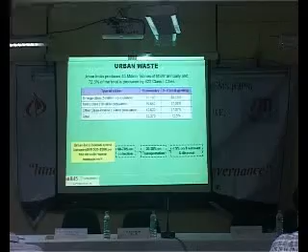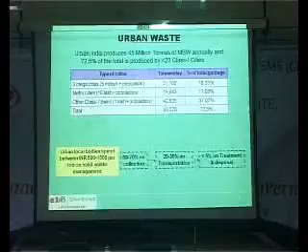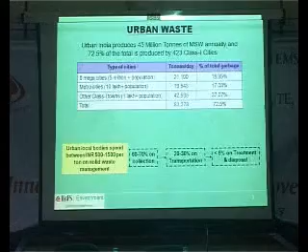Looking at municipal budgetary provisions, almost 500 to 1500 rupees per ton is being spent on various activities in waste management segments—collection, transportation, treatment and disposal. Predominantly across the board, most urban local bodies spend the majority of money on collection and transportation. Unfortunately, only 5% of the budgetary allocation goes into treatment and disposal, which is the major cause for concern.

My presentation is going to focus on that, because we have done a lot of work and developed good practices—in fact, as mentioned this morning, compactors and other measures have been introduced. Garbage is something you can visually see, and there's a problem with the city's urban local body being unable to manage it. But it's not really the fault of the urban local body, because at the end of the day, it is not them who created the garbage—it is people like us, the citizens, who create this waste, which creates a problem like this.

But if you look at it, whether it's Dhapa in Kolkata or Deonar in Mumbai, the physical features of any dumping ground are almost similar. I don't even need to name the place, because the majority of urban local bodies face this kind of problem where open dumping is happening. There is absolutely no scientific management of collection, transportation, treatment or disposal, and majority of these places are in the middle of residential or commercial areas, causing huge issues for people living around them.

It's not only an environmental health issue, it is also a social issue. People who live around that place are socially ostracized, in their family, with their friends and all. There are examples for it, and in my presentation I will briefly talk about that.

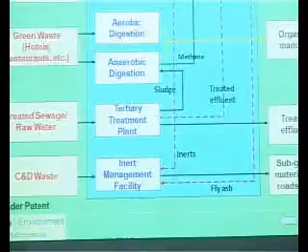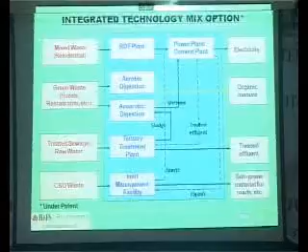Most of the garbage in Indian conditions has a majority of organic waste. In Mumbai, for instance, it's between 50 and 55% organic waste. I believe Kolkata would be between 45 and 50%. The problem is you have to have a technology which meets the type of waste you have, and ensures the other components in the waste are also processed properly.

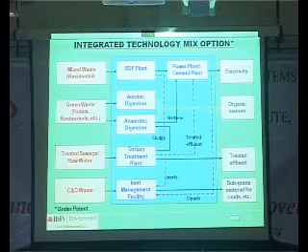This is just an example of how the integrated waste technology mix has to be designed. It basically says you have mixed residential waste which is good in organic content. The recyclable material in it, like waste paper and plastic rags, can easily go to an RDF facility. I'm assuming everyone is aware RDF stands for refuse derived fuel, also known as green coal.

The organic component can go into making compost, which becomes organic manure. But the recyclable component, if processed properly, can be used to make green coal, and this RDF can easily be burnt in any cement kiln as an alternate fuel.

The waste generated in hotels, restaurants and so on has organic content in it, so it can go for either anaerobic digestion or aerobic composting.

Sewage is also one of the other problems urban local bodies face. What I'm trying to show in this slide is that treated sewage raw water also has good microorganisms which can help increase the degradation process. So if you combine the treated sewage, which otherwise becomes a huge problem for you, another stream of a problem, with your treatment technology, it can easily be tackled in combination with a plant like this.

This is a story where I'll begin with where we all started, in the city of Mumbai. It also talks about the project which I'm going to tell you about. I'm very happy to share with you, my friends, this is the first project on a public-private partnership which has received a lot of goodwill, not only from the people who lived around it, but also on a national and international level.

This project has been talked about because of its size, and because of the engineering problems which were there. I'm very happy to share with you, this is one of the first projects of urban regeneration, where an old dump site was converted into a green park. That is the story of the Gorai dumping grounds.

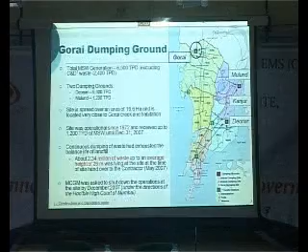The project has already been completed, and I will be happy to share with you some photographs of before, how the dumping ground was. I will also show you what has been done, and how it looks now.

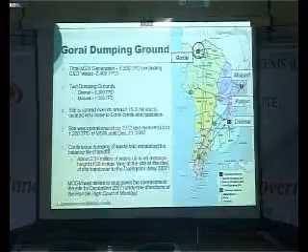Funding is given by your body? No, I'll also talk about the funding part, sir. It's a public-private partnership framework.

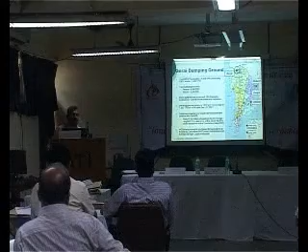Can somebody turn on the lights, can you gentlemen see the photographs clearly? This is important for you to take back home with you. This is something that is possible when it comes to urban local bodies, and the issues faced by them.

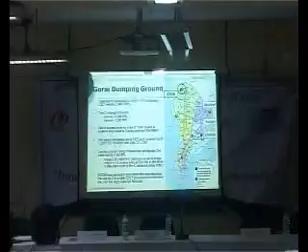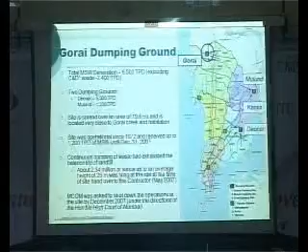City of Mumbai generates about 6,500 tons of garbage. It predominantly comes in from various households. A lot of industrial waste also, in a clandestine manner, lands up in the dumping ground. I'm talking about the numbers which have fundamentally been recorded in the books. Obviously there are other numbers which I will not be in a position to share with you, but the quantity is much more than what is officially projected.

Those of you who have visited Mumbai know it's a very typical situation, stretching only north to south, and surrounded by creek or water on all sides. It's an engineering challenge, and these are things which I'll be highlighting, why waste management in the city of Mumbai is so difficult, and why it's important.

Fundamentally, 6,500 tons of garbage was being generated. The place on the extreme right-hand corner is known as Deonar, Kanjur, and Mulund. These were the three sites. Out of these, Deonar and Mulund were the two sites the corporation was using for disposing of their garbage. The garbage being generated in the western suburbs of Mumbai was all going to Gorai.

Do we have some kind of a laser pointer? Okay, it's okay. It's not in this one.

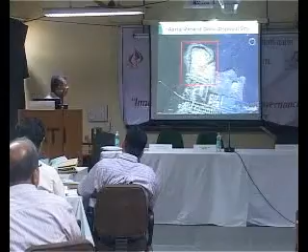You also see here these boxes, like matchboxes, which are a residential area. So you can see a garbage dump sitting on a creek which is tidally influenced, in a very eco-fragile environment of mangroves, with a residential area right next to it.